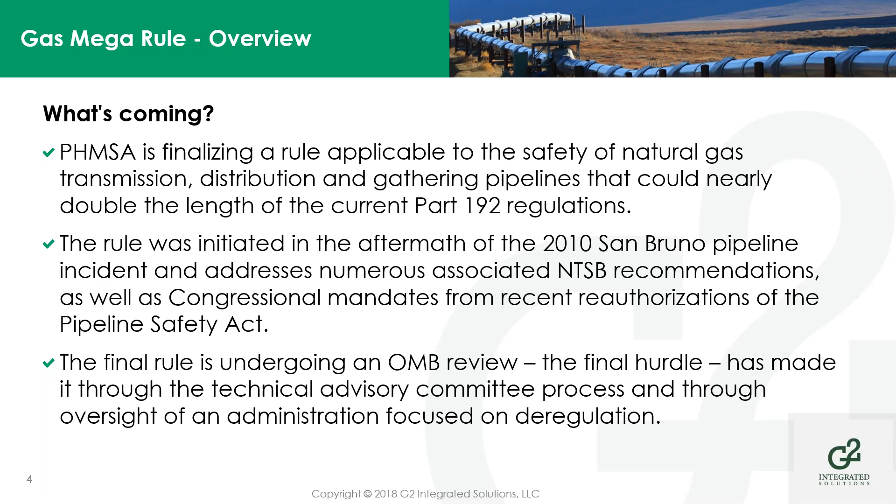Due to the size and complexity of the new rule, it's been split into 3 smaller rules. The first, expected this fall, or really any time now, will apply to transmission and distribution pipelines. It will focus primarily on satisfying those outstanding mandates and NTSB recommendations, and will include new MAOP reconfirmation requirements and an expansion of assessment requirements.

The second part, expected by the end of this year, will apply to transmission and distribution pipelines as well, and will include criteria for repair, integrity management, cathodic protection, and a management of change component. The third part, likely next year, will apply to gathering pipelines and will include a redefinition, if you will, of gathering. You'll hear more about that in a little bit.

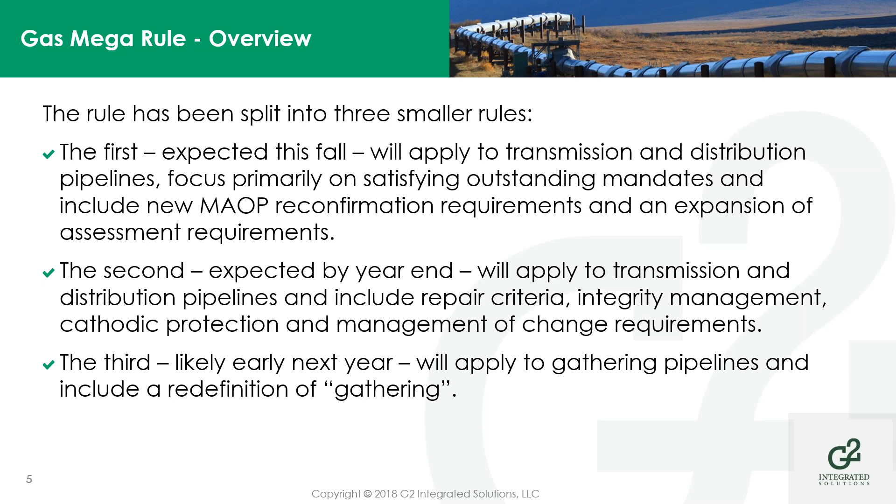Thank you, Michael. Now we'll have Anna Flunway. She'll kick off our discussion of topics included in the first part of the rule. The discussion is interactive, so panelists feel free to jump in and contribute your comments and insight as we go along. Thank you, Elena. Good morning, everybody.

So part 1 is one of the 3 original 2016 rulemaking. This only covers transmission pipeline. The topics included in this part one include fracture mechanics, spike testing, and the definition of traceable, verifiable, complete, which was defined in the 2012 PHMSA advisory bulletin. For the purpose of this webinar, we're just going to focus on the record changes requirement, the record requirement section.

We're also going to be reviewing practical approaches to material verification, MAOP determination and reconfirmation, as well as MCA determination. In subsequent webinars, we'll go ahead and discuss other parts of the first part of the mega rule.

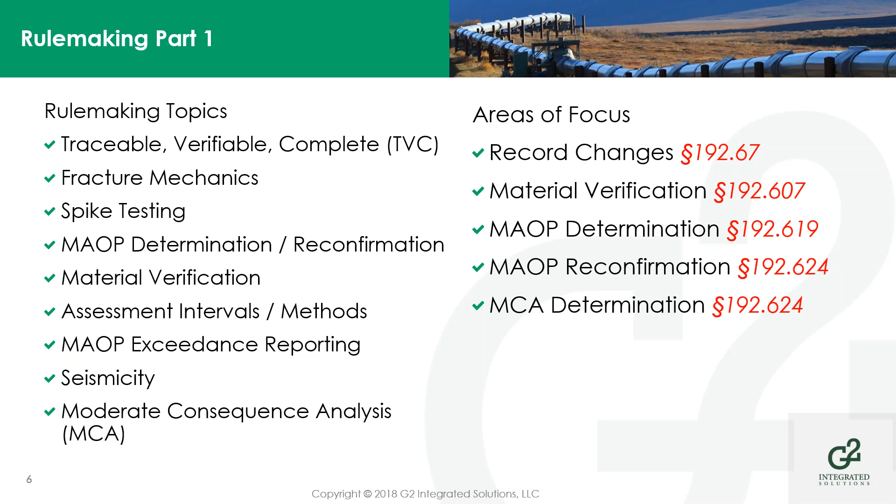PHMSA is proposing to improve the record requirements for design, construction, and operations of transmission pipeline. One of the common language we have noticed so far is that they are requiring operators to start retaining records for some sections of records and documentation within 192.

For example, weld qualification, that's 192.227 - they are requiring that operators retain the welder's qualification for 5 years after installation. But what should operators be focused on now? What should they be looking at? The question here is, how will you collect these records? How do you intend to integrate them into your system?

Are you going to collect records electronically, or continue with paperwork? The other question is the quality of the record. How do you define the quality of the content? How do you start from the get-go to mitigate or reduce potential gaps? And where will all this record and documentation reside? Do you want it accessible to different groups within the organization?

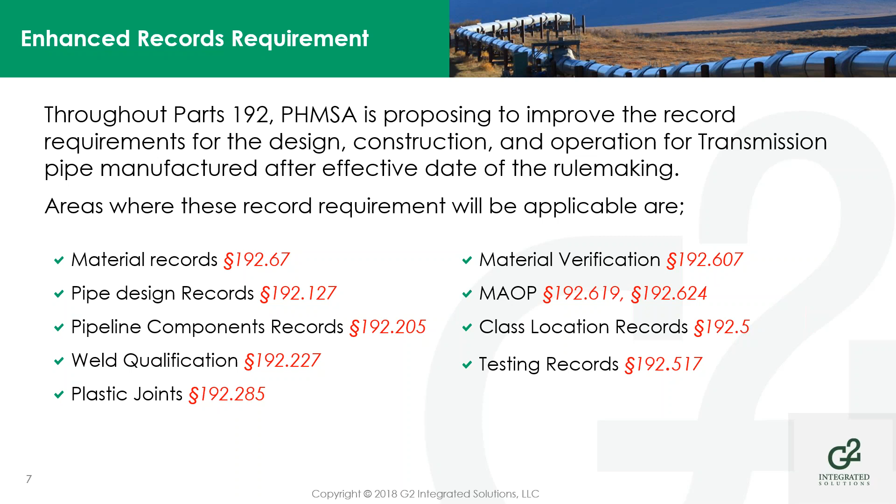So this next slide, we're going to talk about the planning process for doing your material verification through to your MAOP reconfirmation. Most importantly, stakeholders need to be in the room to define the scope of what they want to achieve. Have the compliance person in the room to talk about the record requirements and the MAOP requirements.

Talk about the targeted records that can help you achieve the end goal. Define what your default values are going to be throughout the process. And ask yourself whether there are other measures you want to put in place to increase your confidence level throughout the process.

Then the next part is data management. Do you have all these papers sitting in storage, in a box? Are we going to scan it? Are we going to index this paperwork? Are we going to digitize it? Are we going to have a naming convention so the record is searchable in our system?

Also, you're going to talk about the data capturing part of this process. How do you want to capture this data? Do you want to capture it on Excel? Do you want to do it on Access? Either way, you want to put it on a database or platform that can be easily integrated into your entire system.

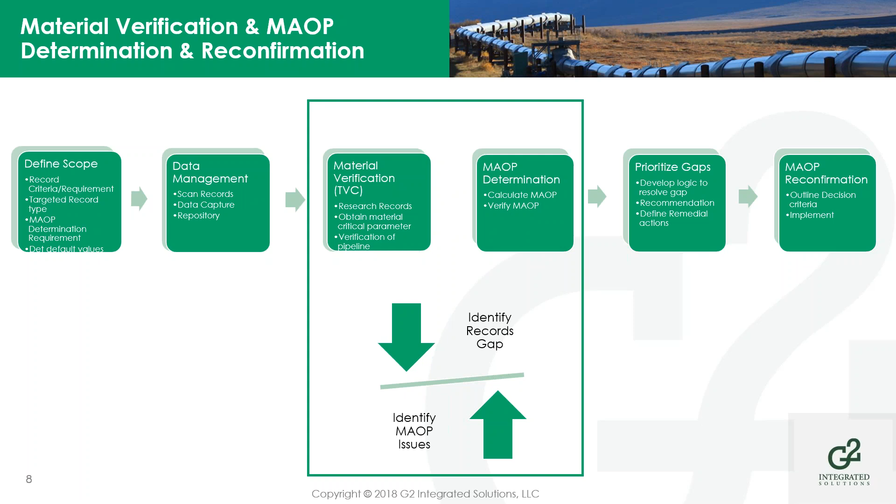So right now I'm going to pass on to Daryl to talk about data governance. So far we've been talking a lot about records management. So what is a roadmap for effective record and data management?

We've got data coming in from all over the place. If we're talking new construction, there's an enormous amount of data generated on a new construction project. Just maintaining your pipeline systems, there's a lot of records generated. So we need to understand where all the different data is coming from. Is it spatial data? Is it something you have to keep for the life of the pipeline? These are all the questions you start asking when you're developing a data governance program.

With a proper data governance program, we're going to answer all these questions. We're going to protect ourselves. We're going to meet all the needs of regulatory, engineering, operations, compliance, and really support the overall operations and be effective in that manner. What really drives this is SME input.

What's important to them, what's important from the compliance group, engineering group, operations—put this into your processes and procedures and let that dictate how you manage your data. So if you've got a well-organized workflow process established, doing things like TVC, doing data migrations, conditioning your data, it all becomes much more systematic.

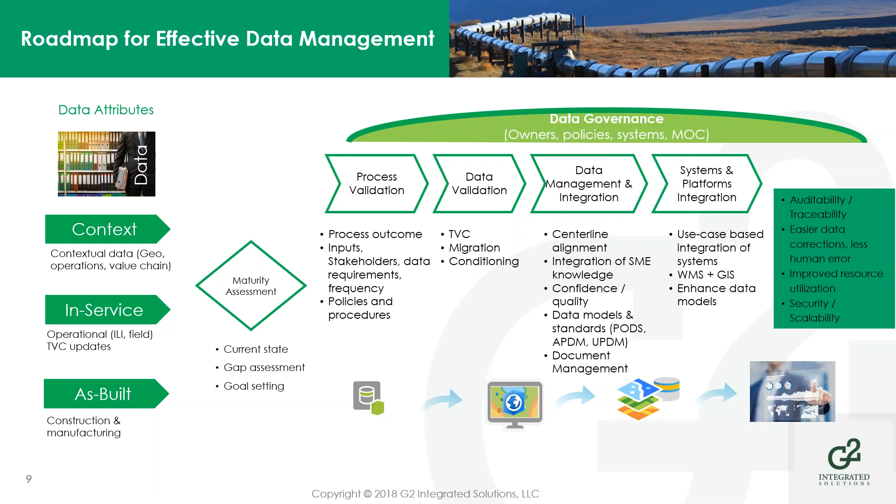Absolutely. So one of the new requirements coming out of this phase 1 rule is the moderate consequence area analysis, the MCA. This is going to change things for years. We've had high consequence areas, it's well understood, all the operators take this into account. Now we're introducing this new consequence, the moderate consequence area, which will be significant for operators to account for.

Basically, what this is saying is for any pipeline operating greater than 30% of SMYS, we're going to look at if within a PIR there's greater than 5 buildings, and that's going to add this new consequence to a lot of operators. A lot of operators who maybe never had a high consequence area before, maybe more of a rural area, there's a good chance they may have MCAs now.

One of the things that's been debated back and forth, and I'll be interested to see how it turns out in the final rule, is the identified sites. These are areas that may be difficult to evacuate, or areas like a business. It's gone back and forth. Originally they were looking at an identified site for MCAs to have 5 or more people. Now they've gone back and maybe they don't want to change that definition of identified site, and want to leave the same definition as it is for HCAs. So it's going to be really interesting to see what the final rule shows there.

And we as G2, and I know you as a particular lead in the team, we've done some MCAs. So why don't you talk a little bit about that experience?

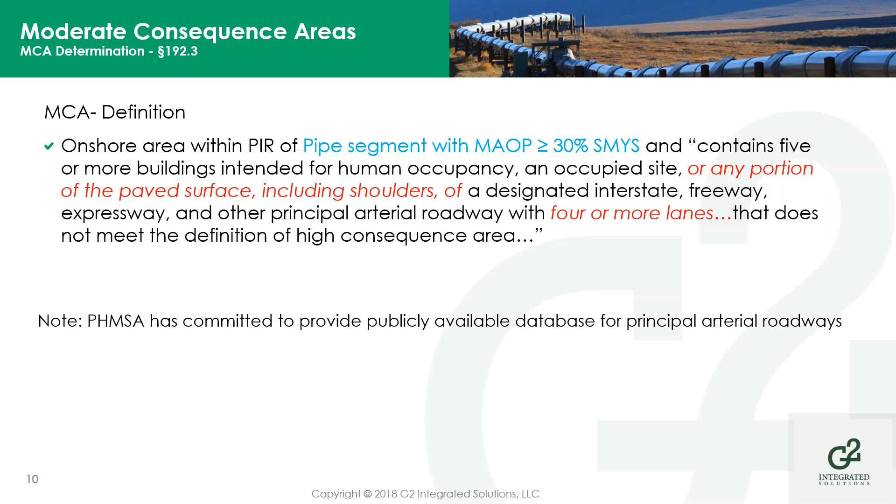So how's this going to really affect operators? A lot of it depends on where they go with the identified sites. If they leave the identified site definition the same as it is for high consequence areas, I don't think it'll have as big an impact as if they were going to have to go back to 5 sites. If they go that route, you're going to have to confirm your existing structure data anyways, but that's going to really cause a lot of verification. Something like a small daycare could cause something, because initially people were just looking for 20 or more people in an area. So it'll be really interesting how the final rule plays out.

But regardless of how that comes, accounting for this requires constant field data collection and verifying out in the field what you have. So there's confirming your existing data, updating your data, doing a lot of field data collection, and moving more toward electronic field data collection to ease the collecting of data and integrating it back into your system in a timely manner.

And this goes all back to your data governance. From a field data collection standpoint, if you've got well-defined procedures and processes to collect that data, it's so much easier to get it back in your system in a timely manner.

You're going to have to figure out how to get the road data in. There's lots of different sources for road data, you can get this kind of data at the state level, at the federal level. So each organization is going to have to figure out how they want to integrate that data in. Whatever tools they're currently using to do their HCA analysis will need to be updated to account for the changes in the rule.

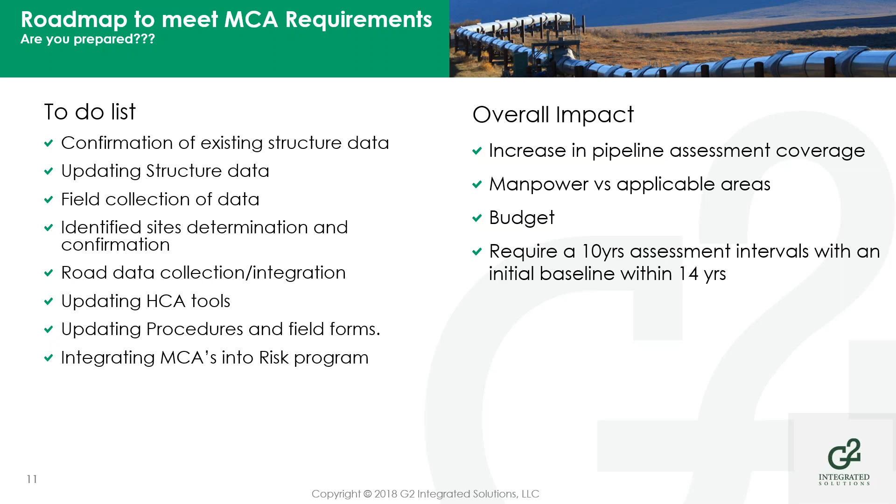Thanks, Elena. Hello, everyone. So basically, PHMSA is proposing to amend 192 subpart O to add more requirements. What does that mean? Currently, everyone is required to have an integrity management program for the covered areas, which are basically your HCAs. But now, within HCAs, you've got even more requirements, and outside HCAs, some of those requirements will filter and go out into outside HCA areas.

What does all that mean? You've got new assessment methods being proposed. Currently there are only 3 or 4: ILI, pressure test, direct assessment which includes ECDA, ICDA, SCCDA, and the 4th is other technology, which requires 180-day notification to PHMSA and includes guided wave and other technologies. So there are 3 new proposed assessment methods, making a total of 7. Those 3 additional ones are spike test, in-situ direct assessment, and guided wave.

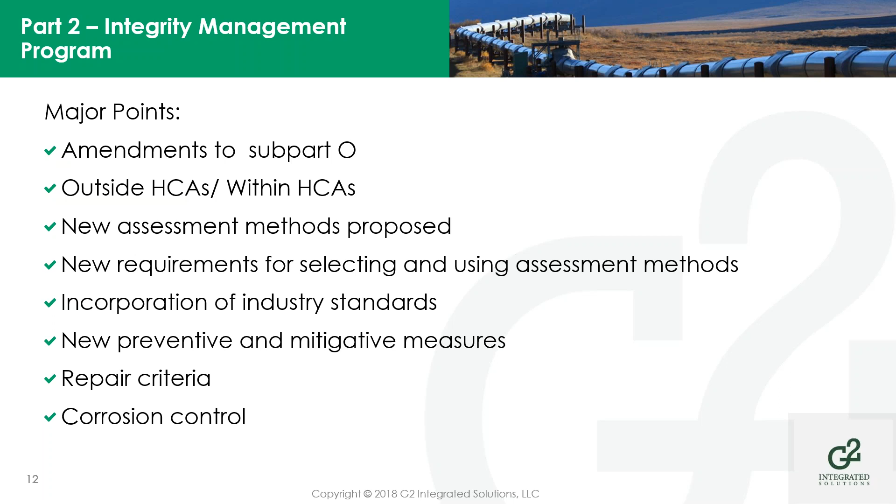Thank you, Hamoud. The third part of the proposed rule deals with changes to gas gathering requirements, and Daryl will provide us an update.

Traditionally, the industry's used API RP80 for determining what a gathering line is. You look at RP80 and it's 65 plus pages to try to determine how to define a gathering line, and PHMSA initially was trying to condense a 65-page document down to three words. I know that it's been pulled back, that API and their committees are now working again to try and address that and clean that definition up to make it a whole lot easier to understand.

I think it's PHMSA's position that they want anything from the well to the transmission line to be defined as a gathering line. If you looked at the previous definitions, it was really ambiguous, and there was a lot of hemming and hawing on what could be considered a gathering line. Whatever pans out, as you mentioned, they're really leaning toward API to help define that, and I think it's going to be a better, much simpler definition of what a gathering line is. And regardless of where the definition goes, there's still some things right now that you have to comply with, and that's the endpoint.

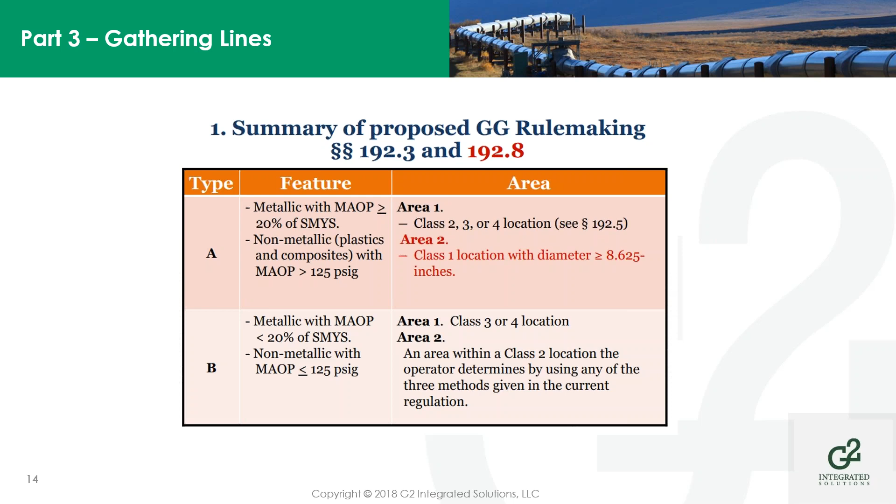So that's 90,000 miles of new regulated line, and then for reporting requirements on unregulated lines, it's estimated over 400,000 miles of unregulated gathering lines. So even if not fully regulated, they're going to have reporting requirements. That's pretty significant. Out of that 400,000, because of this new rule, almost 20 to 25% of the unregulated lines are now being regulated, and the remaining 350,000, give or take, is still going to be subject to annual reporting requirements.

They're going to be responsible for damage prevention, public awareness, establishing MAOP and documenting that, line markers, and documenting repairs. Leakage surveys is another one, and there's been a lot of discussion on how this is going to be done. Industry has said this is something they'd like to implement, but it's going to be expensive and take time. So it'll be interesting to see how the final rule handles the time given for establishing leakage survey systems.

On corrosion control, the stats PHMSA was looking at showed something in the neighborhood of 60+% of the leaks and incidents that occurred on gathering lines were due to corrosion. So it's a significant event, and it's being looked at closely. It's highly visible to PHMSA.

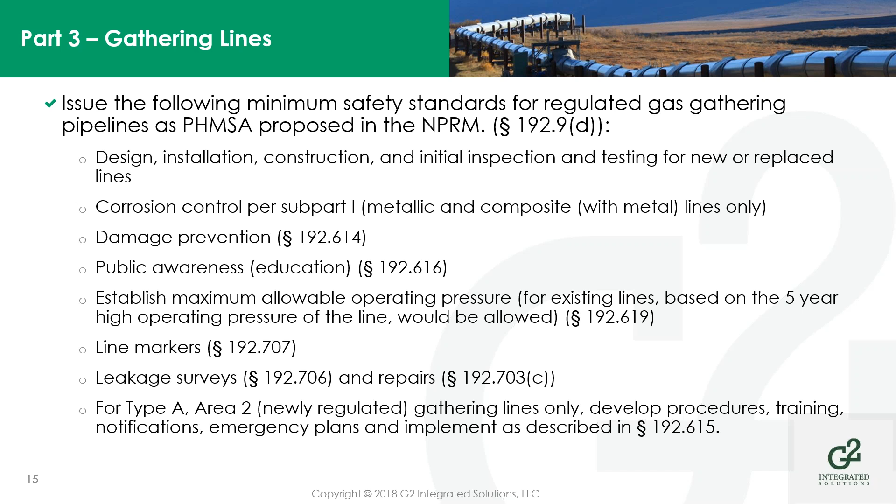Thank you, Darryl. Mark Trivik will now provide insights regarding anticipated impacts of the gas mega rule on differing operators.

Then there's the smaller midstreams. Those are the guys where the transmission—we'd say maybe they're just intrastate operators, maybe operating a 150-mile system. They're smaller companies doing what they need to do. In the midstreams, they may have a lot of gathering assets. The transmission guys may not have any gathering assets, or probably a good mix of all of it.

And then the last one, the accidental operators. I've got the word multinational oil companies up there, and I have it on there on purpose. It's not that ExxonMobil doesn't have pipeline groups well-versed in all of that work—where I'm talking about is at the micro level, at the field level. There's a lot of places where production people may come in and need to add a line from a battery to a compressor station, completely unaware that they're now in a regulated environment.

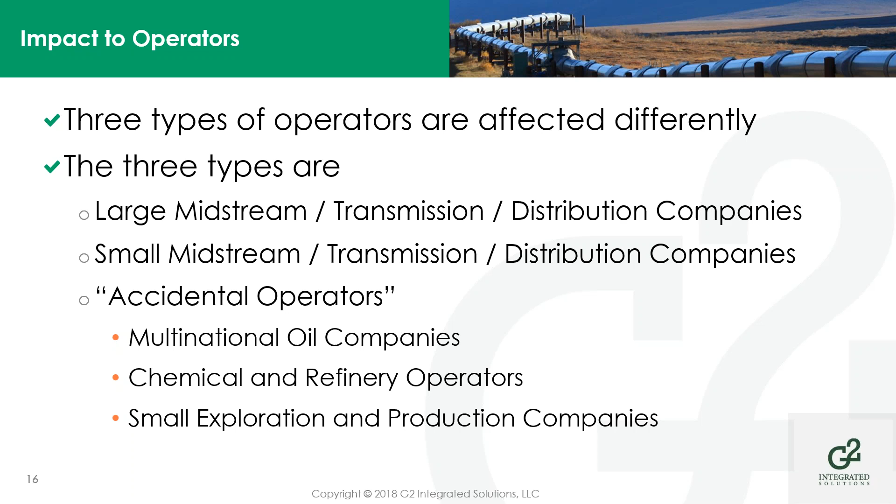Now the big guys—the first part and the second part of the rule are going to probably primarily affect them. They're ready for that. They've got the staffs in place, they're well-versed in MAOP calculation, they've got their GIS, they know where their data is, they're subject to audits. Short of the MCA and some of the additional integrity management and risk management requirements, we don't anticipate it's really a huge financial impact, because again, they're ready for it. Those are the first ones that are going to come down the pike.

The smaller guys, they're aware of the rules, they operate in that environment, but they may not have the staff to accommodate the newer rules, in particular with the gathering. The MCAs—they may or may not be ready for that. If you're running 100 miles of line and suddenly you've got to double up your records because of the integrity management, you've got to come up with new procedures. Those are going to start creating some financial impacts to them. Their budgets aren't as big, they don't have the people in place, and they're going to have to start going out trying to find consultants or hire staff to help run these new rules.

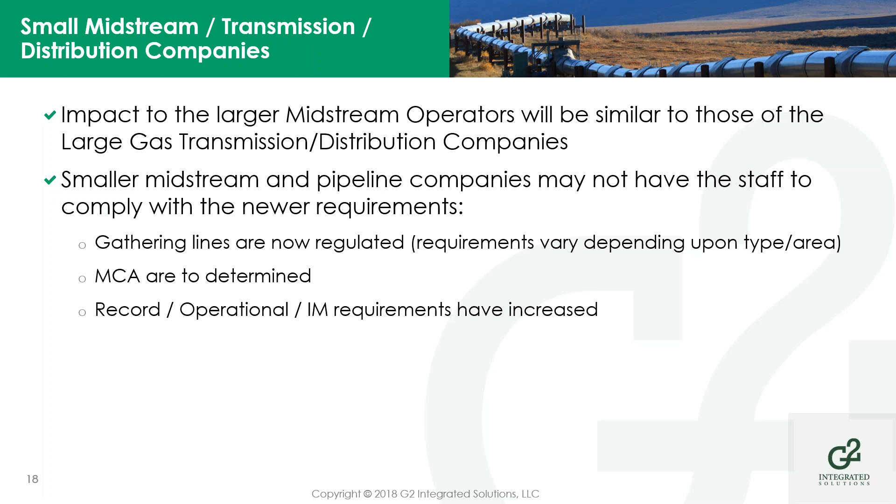And then the ones that really are going to get crushed initially, I think, are the accidental operators. The guys at the multinationals, even at the field level, probably they're going to be okay. But these smaller guys, the folks that didn't know they were ever regulated, they've got to invent entire departments, entire organizations around not just the gathering rules, but even the new ones.

If you never knew you were regulated in the first place, you've got to come up with all sorts of processes and procedures. You've got to start being able to calculate MAOP, figure out your records, and you're subject to audits you've never dealt with before. So I think the greatest impact of all these rules is going to be on the accidental guys, because they were never really aware that they were ever regulated in the first place.

The annual reporting requirements for unregulated lines are onerous. If you're not ready for them, if you've never had to fill out a piece of paper before, it's going to be overwhelming in the very beginning. And there's a lot of people now being brought up underneath that rule.

The thing that really brings it home is, 6 months after these regulations are promulgated, you're going to have to be ready to go. And if you're not, it's time for you to go find a consultant who can help you, start hiring the staff to help you. Because if you wait until the rule comes out, you're already behind 100 other people. And if you're behind 100 other people, there's only so many consultants who can do that work, and they're going to be busy. So you may end up in a situation where you're not able to comply early enough.

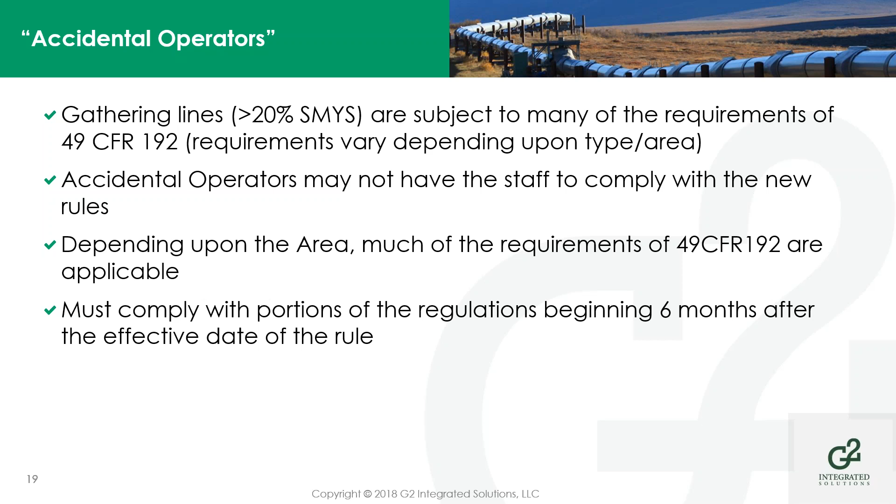Okay, thank you to the panel. So we've received questions, and I think we have a bit of time to discuss. One that came in regards to preventive and mitigative measures: have there been suggestions in terms of technologies that should be used for overpressure protection? Maybe Hamoud, we'll start with you and others can jump in.

So a lot of these rules are still in the making. For overpressure protection, they are suggesting, for example, auto shut-off valves and remote control valves, and leak detection systems as well. Some operators are currently using those already, but they were thinking of making them mandatory and including them in the IMP programs. And that leads to - when you start thinking about whether to put in ASVs or RCVs or leak detection systems, when you go from an automatic to a remote, you have to decide where that remote is coming from. It's probably going to a control room. If you have a leak detection system, where are those alarms going to?

Probably a control room, now you're jurisdictional under control room management regulations. We currently do these for different operators - we do PHMSA recommendations and we've got IMP projects with different operators, and a lot of them are already using some of these, but they're suggested, not required at this point. But I wouldn't be surprised if there are additional requirements.